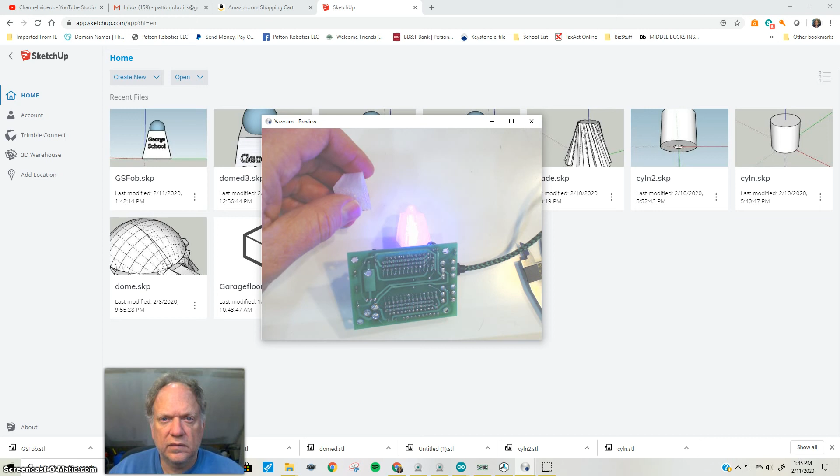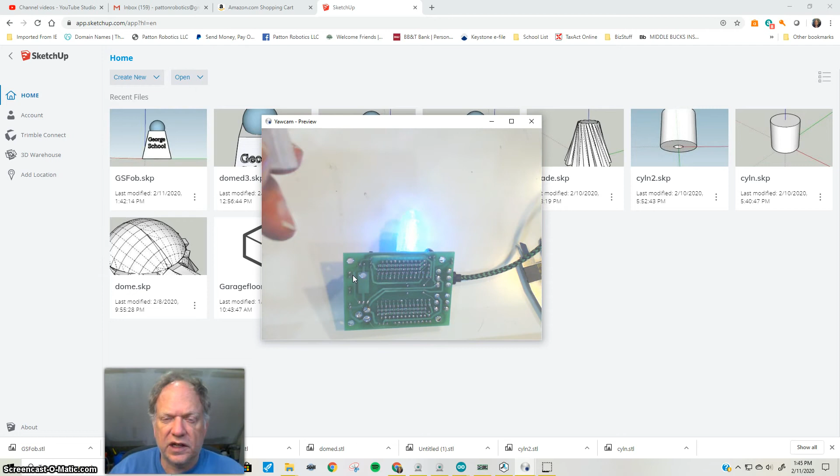I want to show you two other cool techniques to make your light diffusing fobs even cooler. One is adding text, which is a little hard to see here but it does say something, my camera just doesn't catch the contrast well. The second is how to merge solids, either one you import or create. In this case, a sphere was pushed into the top of a pyramid, giving it a cool shape.

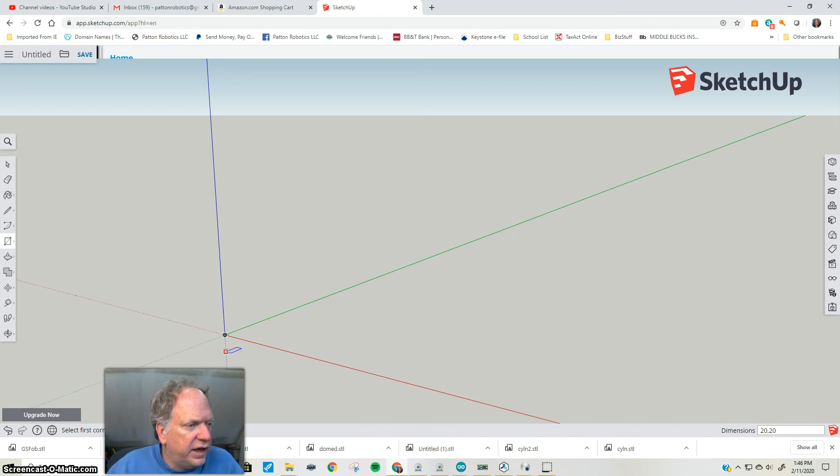To get started, I'm going to use the millimeters template since all our printers work in millimeters. I'll get rid of this figure here, and I'm going to build everything on a 20 by 20 millimeter square. I'll snap to the origin, draw it out, type in 20 comma 20, and now I have a square that's 20 by 20 millimeters. Zooming to extents to see where it is, and I'll go ahead and make it a cube by dragging it up and typing in 20.

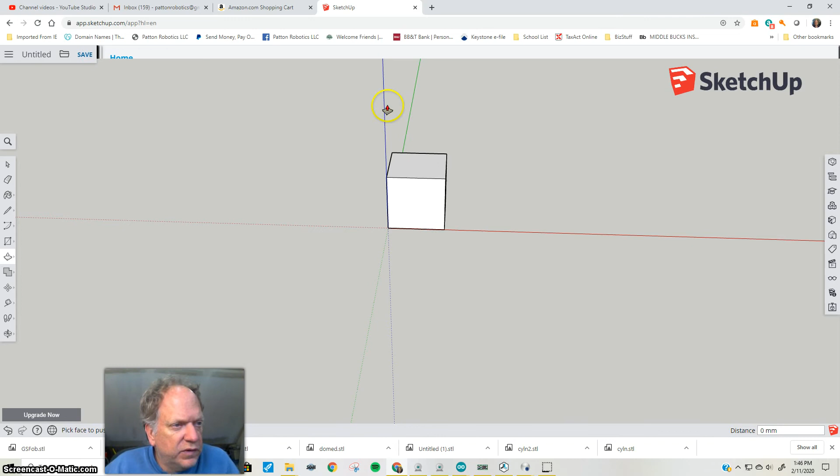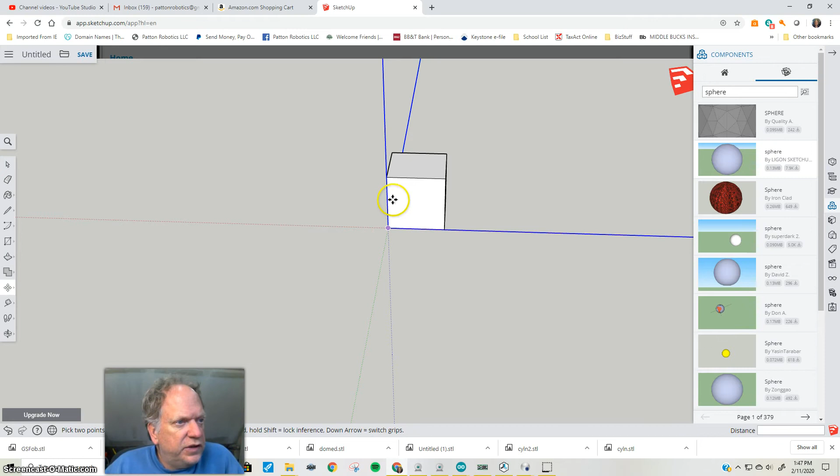Now I want to import a sphere. It's really difficult to draw a good sphere in SketchUp Free, but there are plenty you can download. So I'll go to Components, type in sphere, and grab this first good-looking one. I'll place it right at the endpoint, the origin, and you can see the blue lines indicating it pasted there correctly.

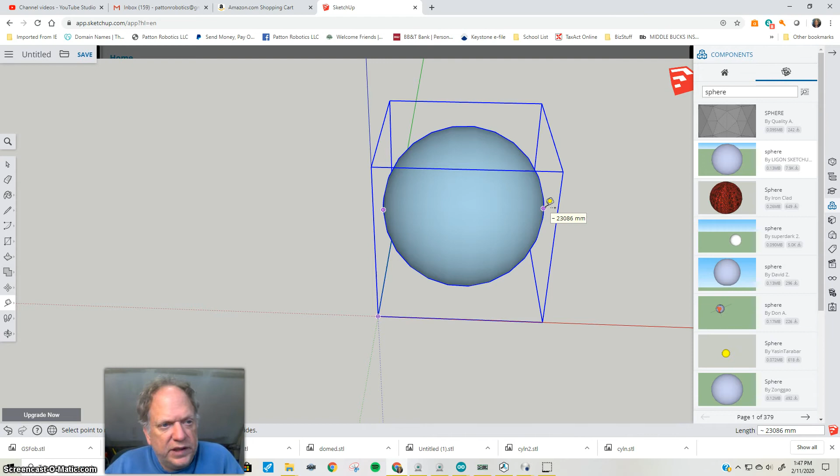The problem is the sphere I placed in is relatively large, as I can see when I zoom out. I'll click the tape measure tool, not to actually draw a line, but just to check the size, and we can see it's about 23,000 millimeters. So I'll clear that.

What we want to do is scale it down. I'll start by bringing it down, holding Control, and dragging a little bit. Let's scale it down to 0.01 to get started. That gives us a more realistic size for a sphere, though it's still huge compared to our invisible 20 by 20 cube.

Next I'll try to move it closer so I can work with it. I'll grab the move tool, or just hit M on the keyboard, and click someplace on that cube. If I'm lucky it'll link to something already on my existing drawing, but since that drawing is so small, the odds of hitting it are pretty slight.

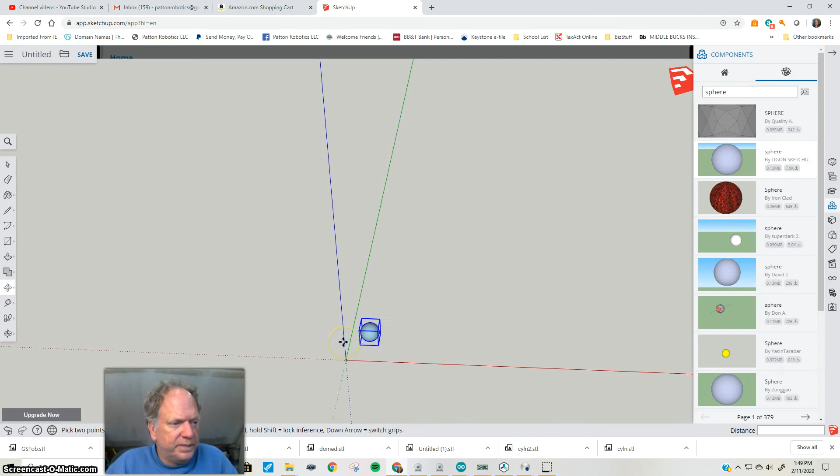So I'll just get close. Now I'll zoom in some more, but I still can barely see it. Let me try to find another spot to click on—this is probably a bad idea. I'll go down here and click on something on the edge to see if I can get it. Oh, there we go, I found it—it snapped onto an endpoint. So now it's at least in the same working zone.

And you can see it's still very large, so let's scale it down again. Let's figure out how big it is. It is roughly, I'm going to click, and I'm not going to click again. I'm just going to guesstimate here. So we'll bring it down by another factor of 100.

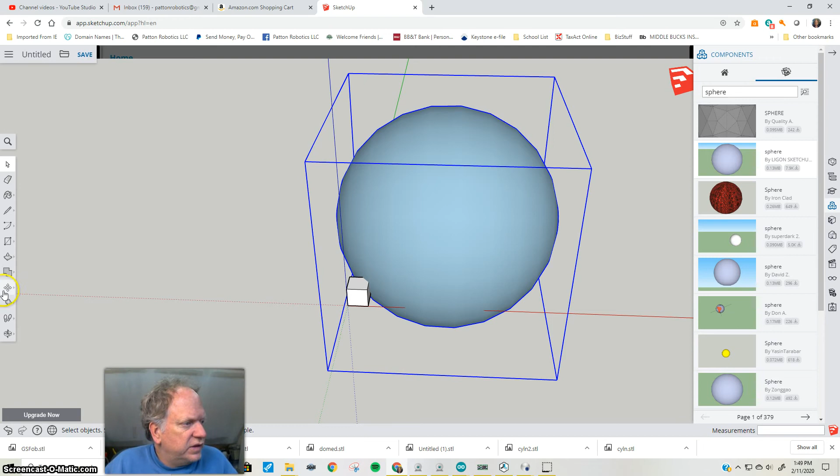So let me go ahead and choose the scale button again. I'm going to hold the control key to scale it to center and drag it a little bit, and let's make it 0.1. Okay, so now at least we're getting to a more reasonable size.

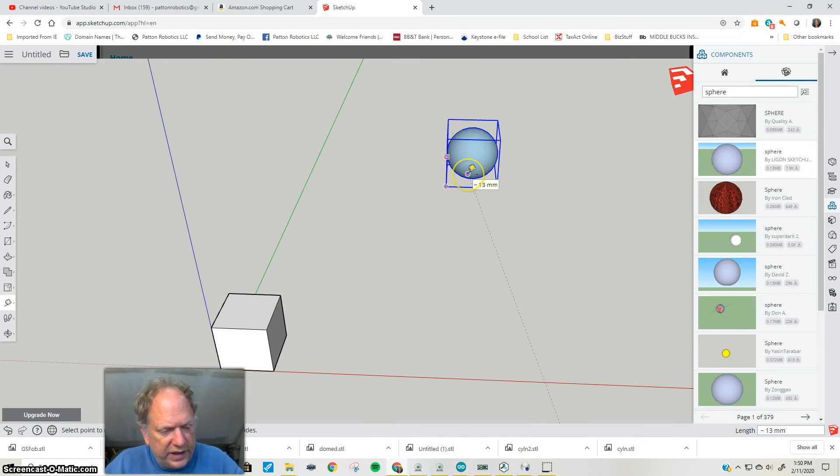It's almost the same size, I think. In fact, it should be just a little bit larger. Let's click on this, we'll get kind of a ballpark idea. Yeah, 13. So what I want to have is something that fits comfortably on top.

So I'm going to scale it by another factor of maybe half, bring it down to 0.5. So we'll get this out of here, and let's scale it again, and bring it down, drag it a little bit. I'll type in 0.5, enter. And now I have a nice small sphere that we can deal with.

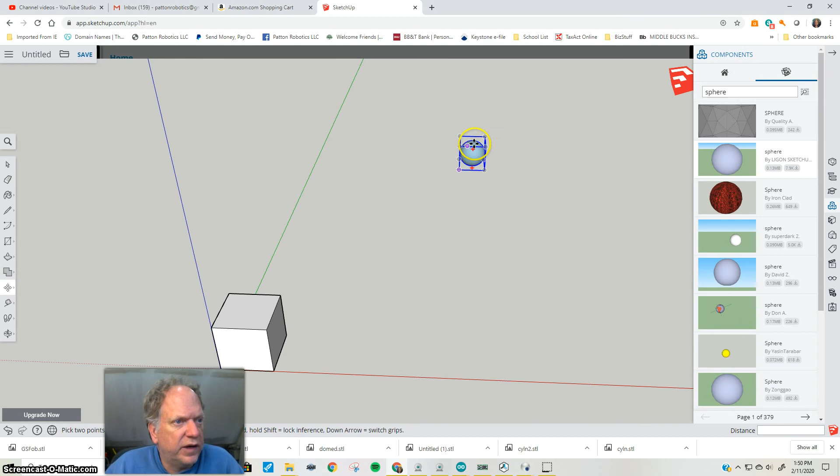Let me go ahead and move it a little closer to my object. I'm going to grab some point at random and get it in here, because what I really want to do is try and find a spot. Zoom out and then back in to kind of center it. I want to be able to catch a spot on the top center if I can, and then I want to move it.

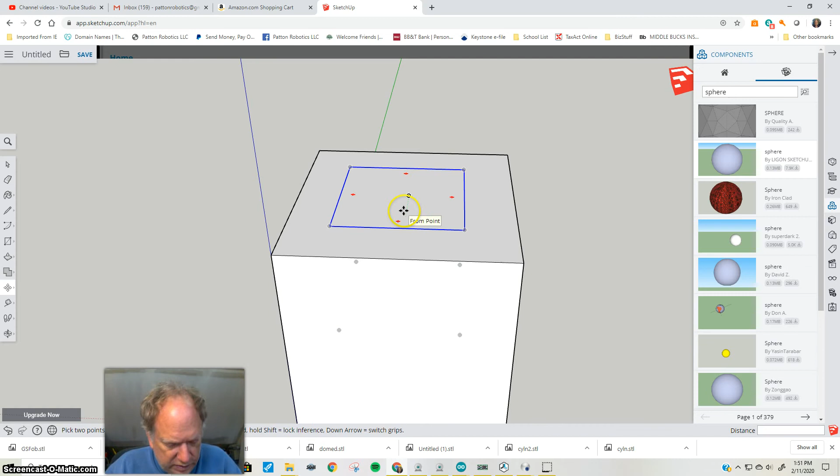Sometimes this can be tough, you're working with three-dimensional space. I want to move it into the center of the cube. That looks pretty good, I clicked on it. Now what I want to do is bring it up some. So I'm going to hit the O key, you can see just a teeny bit of the sphere sticking out of the very top.

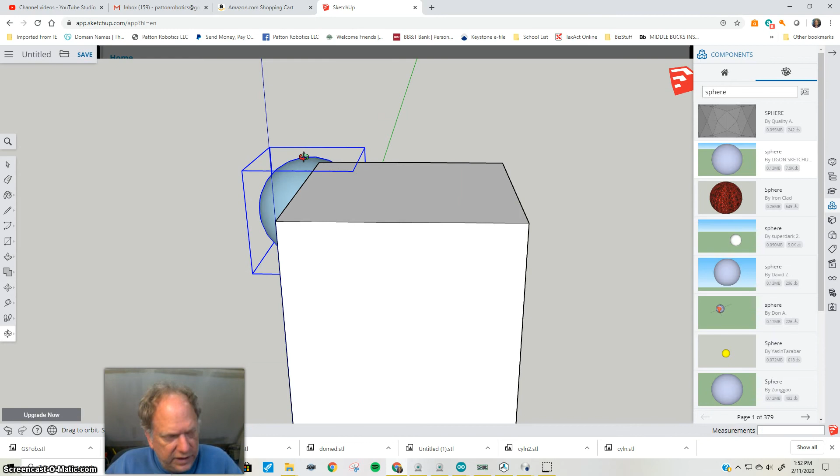And I'm going to click M because I want to move it some more. I want to get right on that sort of midpoint. There we go, and I'm going to pull it up. Oh, sometimes it can be really hard, I might need to use the orbit key. I'm going to move to a different position, hit the M key, and it remembers what I was doing. Well, that's exactly what I want, is in the middle.

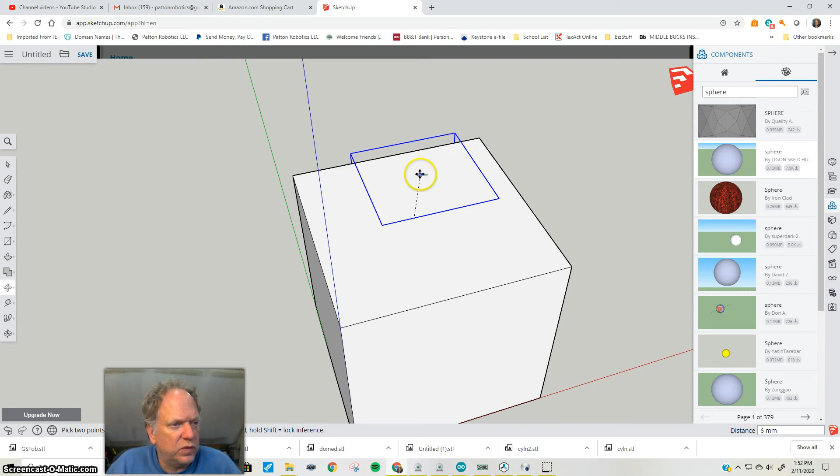I'm going to hit the orbit key again. And again, this can be tough, I'm not going to lie. You're trying to play a game where you can kind of work in a three-dimensional world on a two-dimensional screen, and it oftentimes gets confused with what you're trying to do.

And I think I'm pretty happy with that. Let's take a little—no, I'm not. Well, let's take a look. Am I in this? That looks pretty good, actually. Not too bad, I think I'm pretty close to center. I might—yeah, oh yeah, I can see I need to move it over a little bit. Let's click on the M key again, and I'm going to move it just a bit. There we are, and then we'll spin down.

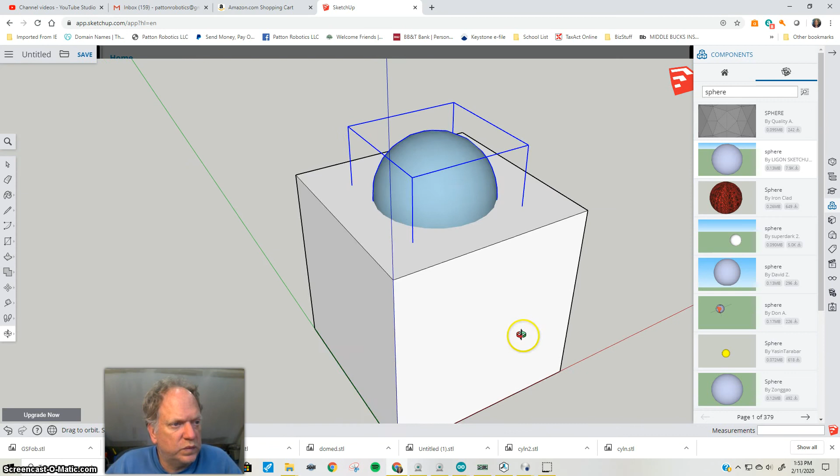Well, I don't want to spend a huge amount of time playing with this, because you don't want to watch me spend a huge amount of time playing with this. But you've got the idea, you can sit there and fiddle with it. I could draw some reference lines across here to help me find center, but I think this is what I want to do right now.

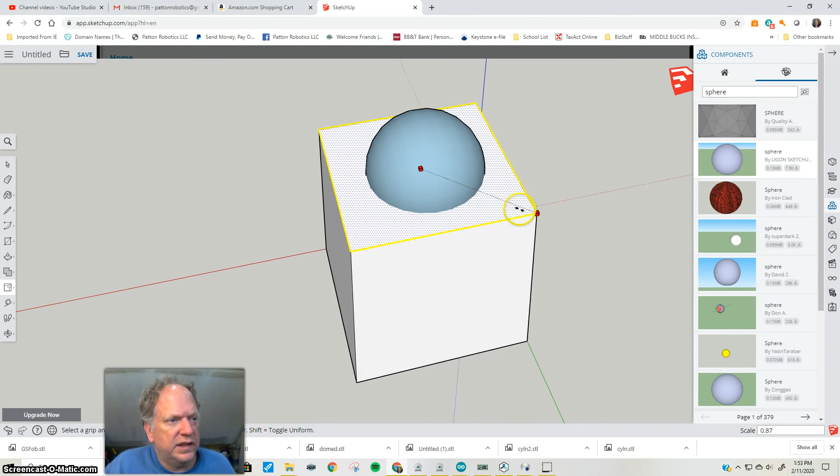I want to make this kind of a quick demonstration. I'm going to click on this surface now, and I want to scale it, and I'm going to hold Ctrl to center, and let's bring this in. Oh, I might have to move it a little bit more. Yeah, you can see I'm not quite center. Well, it's actually pretty good. I might just—well, we'll try one.

We'll try one more. I'm going to click on the object. Oops, click on the object, hit the M key. I'm going to find a midpoint, and I want to move it over.

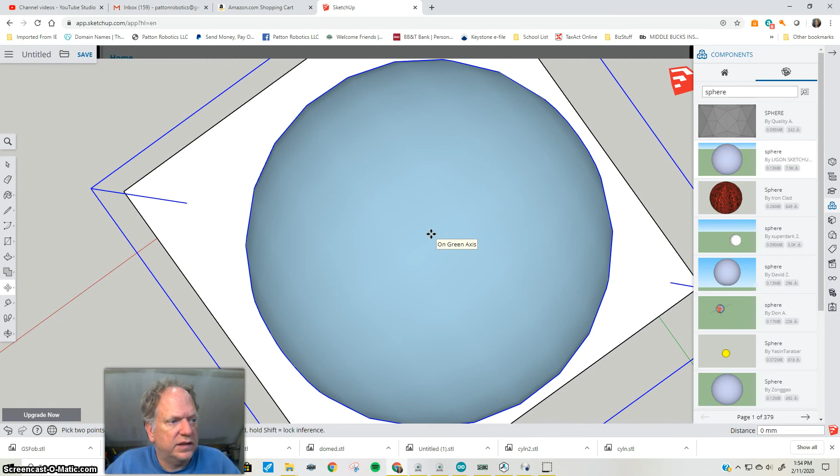Just a bit, keep snapping. Well, again, you don't want to watch me spend a huge amount of time playing with this. So let's stick it here and go ahead.

All right, because it's just a demonstration. Now I've got my sphere placed on top. And the next thing I want to do is add some text to it, so I can do that by clicking on the text key.

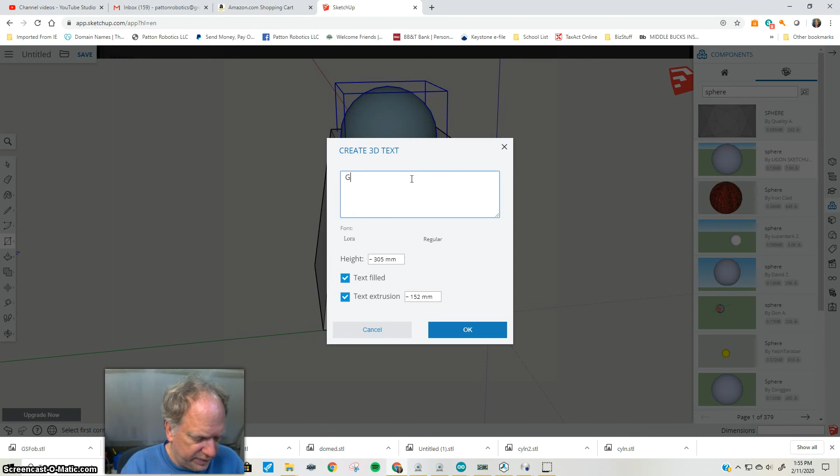And let's go ahead and make a George. Now keep in mind the character height, right? 305, that's huge, right? Our whole block is only 20. So I'm going to make it much smaller.

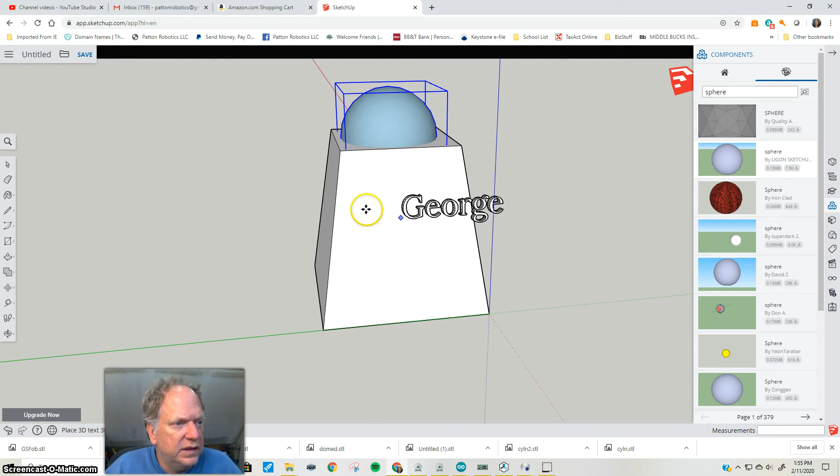I'm going to make it 3 millimeters high. And the extrusion would be the depth, how far they stick out. Well, I really don't want them to stick out very far, I'm going to make them stick out only 1 millimeter. Because if they stick out very far, it's going to be really difficult to print since they'll just drip down.

And I should look on this straight on, and let's kind of get this guy into center. Like so. And let's do it again so we can get the school on here.

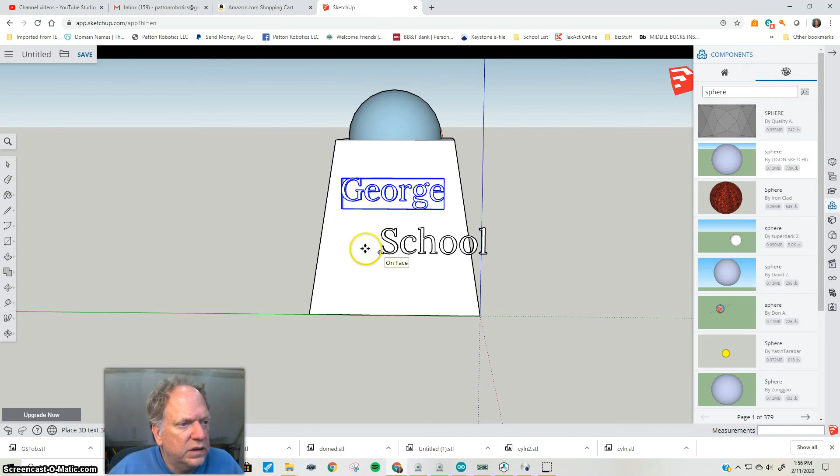And what used to be a real challenge was getting these things to line up. But fortunately, the new software, you can see it actually automatically assumed that I wanted to follow on the angle. So it's sitting on there very nicely. And there you go, so now we've made ourselves a nice sort of fob.

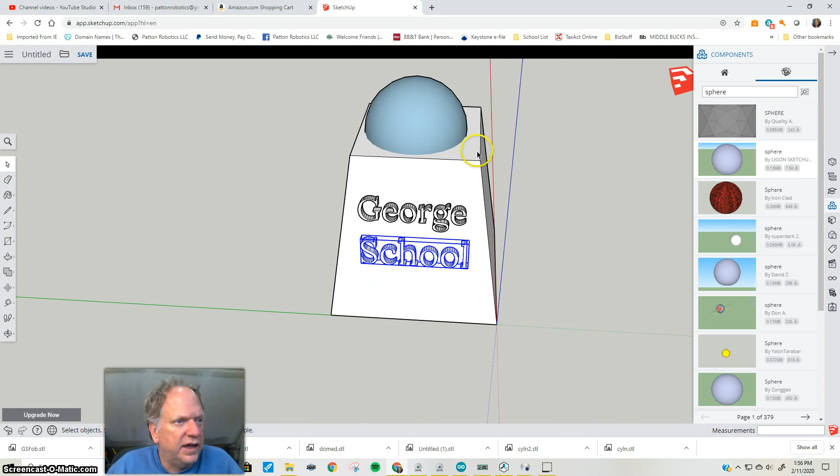Maybe I'll make this top just a little bit smaller just because I can, and we'll make it scaled down just a little bit more. Sorry about the sirens, it's a volunteer fire department. Let's make it right there. Okay, good.

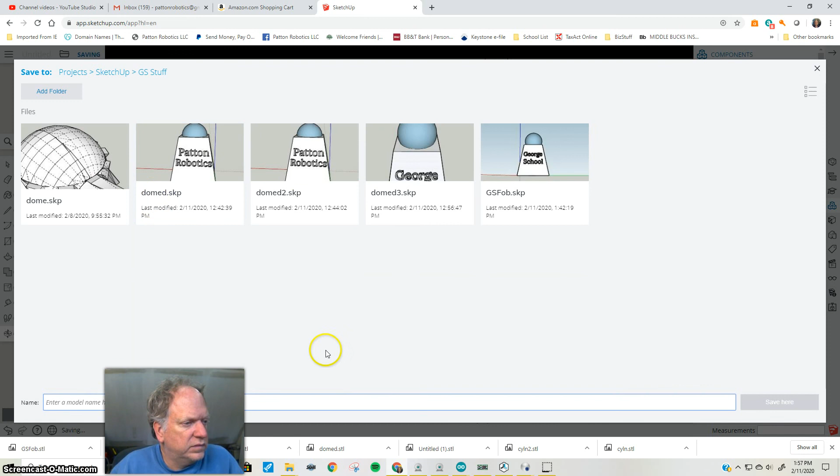Now we will save as. I'll just save it as GS2. And I'm going to export it as an STL file so we can do some 3D printing.

And there you have it. So let me check on my time and maybe I'll be right back. Hold on a second, I knew I forgot a really important step. So if you look, we've got a sphere which is just floating in a solid. What we need to do is make sure that sphere is part of the solid.

So I'm going to right click it. First thing I did is I highlighted it, so now my sphere is in fact selected. I'm going to right click it, and then I'm going to go ahead and select intersect faces with model. And you're going to see what's going to happen is right here a black line is going to appear.

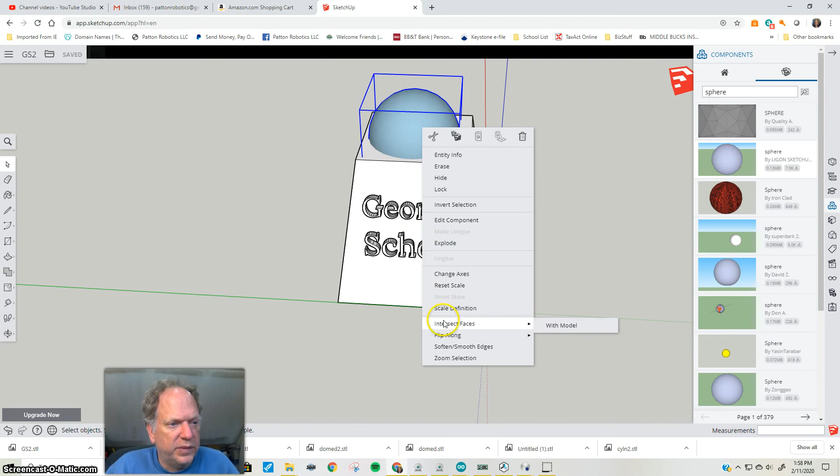Okay, so now every point in which this sphere was making contact with this surface, it is now a defined line. And that's going to be very important when we get to actually making a 3D model of it with the 3D printer. Okay, so now I've got this set up.

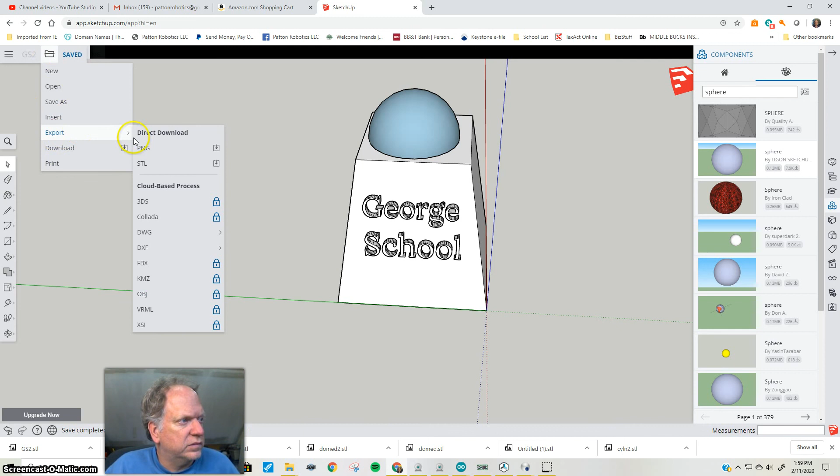I am now going to go ahead and resave it and re-export it. And then what I'm going to do is open it up briefly in the 3D modeling software. So let me go ahead and do that.

Let's go to Repetier, we're going to load, and we're going to go with GS2, open. And notice how this is actually, you can see our George School stuff is showing up right now.

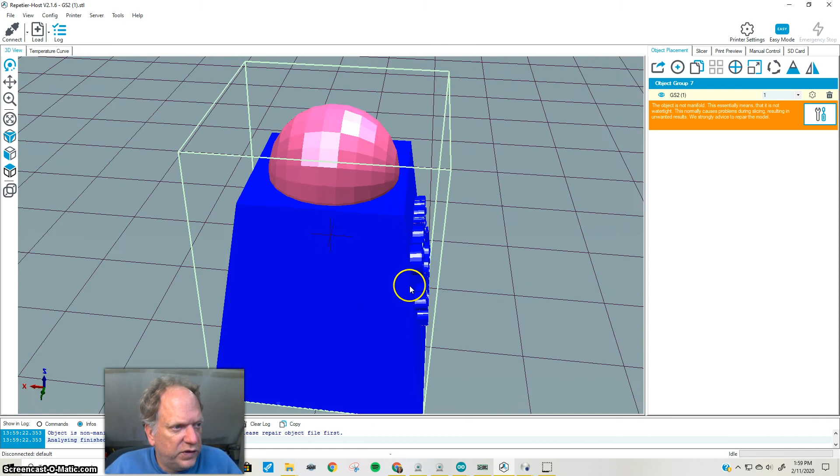This is red, it's giving us a problem. It's not exactly sure what to do. So if I hit this button right here, hopefully within a short period of time, it's going to fix all of these joints which are not fully fused. And in fact, it did perfectly fine.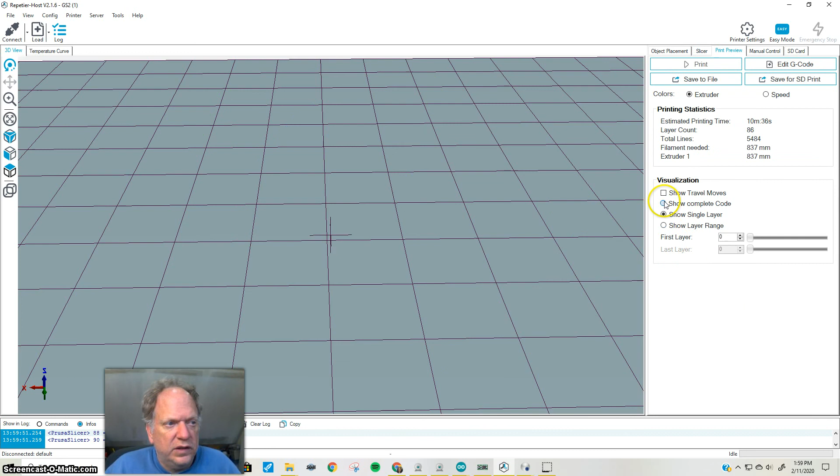Slice, and we're going to slice it. And you can see the completed thing right here. Spin it around. But if we look at it by layer, you can see this is what would actually happen. It would print all these layers individually and eventually build the object.